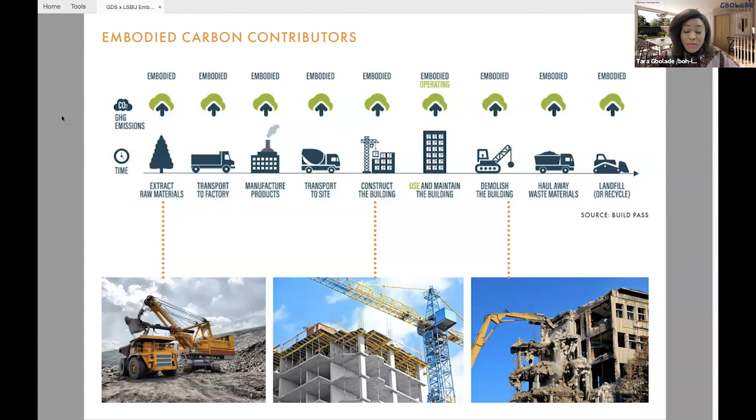We as decision makers have the opportunity and the power to make so many more different choices and decisions, regenerative decisions. When pen hits paper, we are deciding if we're pumping more carbon emissions into the atmosphere. We as architects and built environment specialists make a myriad of daily decisions that either help regenerate or continue to degrade our planet. As a consequence, we decide the quality of life for our communities, our neighbors, and our families. So that's on us. And on that happy note, I'll talk through a couple of projects we're currently working on within the practice that describe how we make better decisions as custodians of our planet.

I will highlight at this point that we recognize we are in transition, me personally, as a practice, industry-wide and nationally as well. And so therefore, I think every win is a win and we should take that and build upon that. So today I'll be talking through Hermitage Mews, which is a small project in London, and another project we're working on in Brixton. I won't really be going through design in detail or approach, but really more about the decisions we've made along the way. So the red, as you can see, highlights our current site.

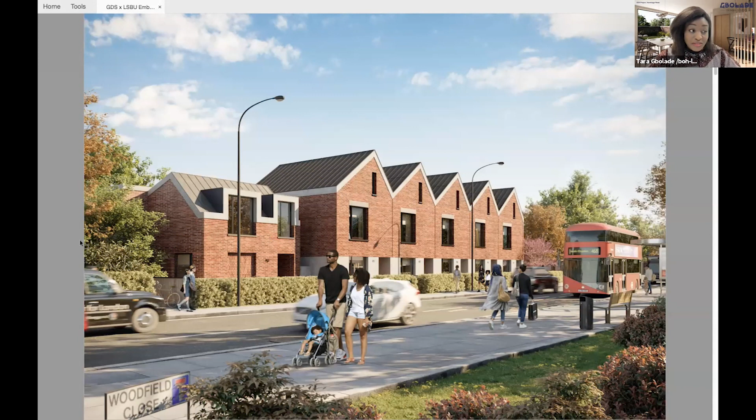It's in Crystal Palace and it accommodates 8 new homes. There were no existing buildings on site. This is a set of 5 terraces, a pair of semi-detached and a detached dwelling. And the scheme is currently on site. As a practice, we always adopt a holistic approach to sustainable design. Of course, this discussion is tailored to embodied carbon, but overall, we ensure that we're addressing aspects such as energy efficiency through to sustainable movement, through to green infrastructure, and that will hopefully come through as I speak today.

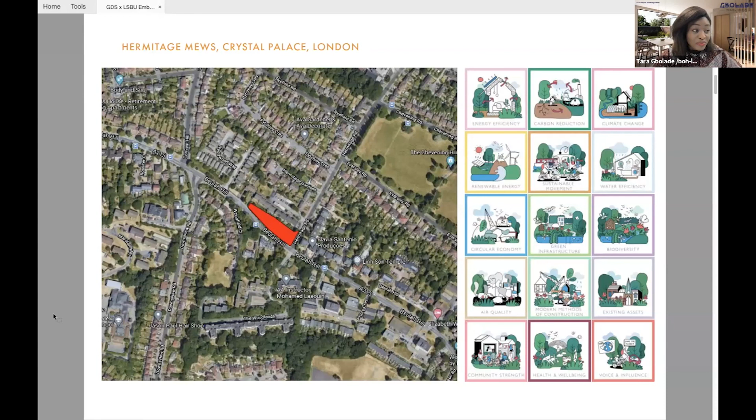The first thing we did, I should say that this scheme had planning by different architects when our clients brought it to us. And so the first thing we did as a practice was to decide with the client on a performance target. We find that these are critical, as highlighted in the earlier talks, for us to get off the ground. The client was good in listening to us, and we agreed on the RIBA 2030 Climate Challenge as a really useful one, mainly because of its simplicity as well.

And I must credit the client for having the appetite and ambition for doing so. And it's important we recognize our role as architects and built environment specialists to influence decision-making. I will highlight here as well that we started the process with many sustainability workshops to ensure that everyone on the team was upskilled as much as possible.

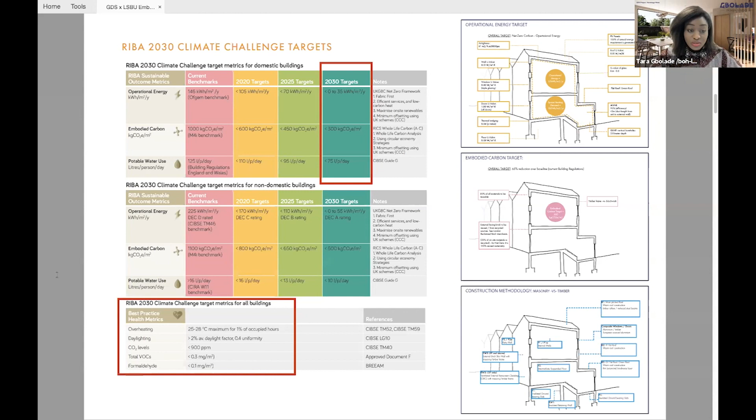And the scheme started with very high-level sketches looking at operational energy separately from embodied carbon, even though we know they're all interlinked, and then through to the construction methodology that would work. I'll expand on these in a moment. The operational energy approach we're pretty confident about, and because we're not having that talk today, I'm going to skip over to our embodied carbon approach.

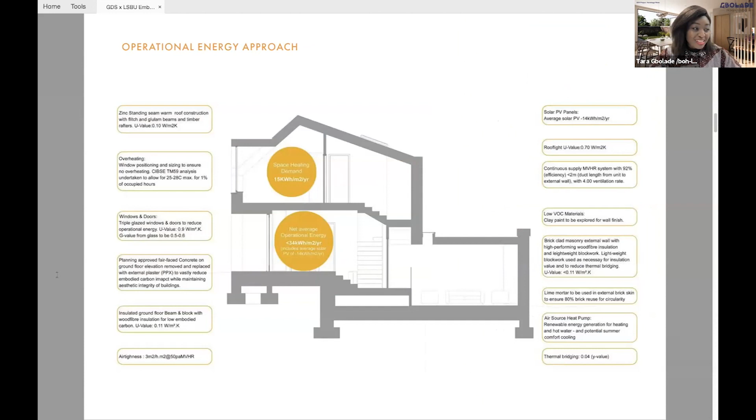We made a myriad of small decisions that we knew would have a larger impact further down the line. Because we had no existing buildings on site, we explored initially the reuse of locally sourced brickwork, which is what we had at planning stage, but also the opportunity to potentially use lime mortar so we could ensure that the building was recyclable if we used new brick. This was abandoned due to curing time and additional programming time, but it's important to highlight that this is an aspiration that the scheme started with.

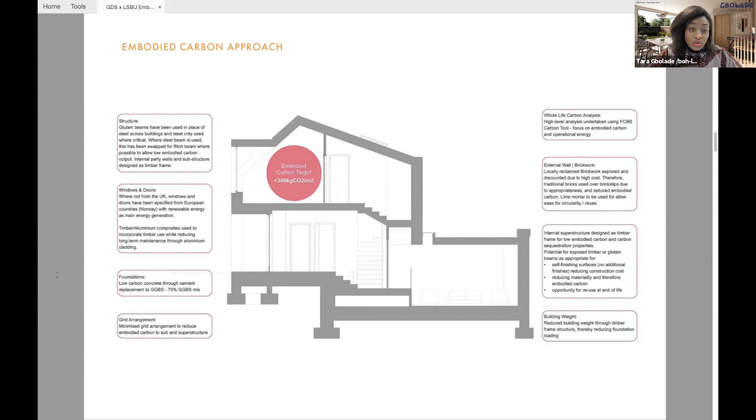We also looked at our structure and looked at the building and rearranged it in a way that meant that we needed less foundations so that the building itself was lighter, thinking ahead to what types of foundations we were going to use. We also, right at the outset, got hold of the FCBS Carbon tool and discussed with our clients what it meant with an overall target of 300 kg of CO2 emissions per square metre if we use masonry construction versus timber.

And you can see that we were trying to target that number of 300 there. And you can see there that initially we were looking at over 1,000 for that. But when we looked at incorporating timber in particular aspects, we were coming right down to 800. And because we had these numbers right at the outset of the scheme, it allowed us to make even more nuanced decisions, which means that as designed, we came down to 450.

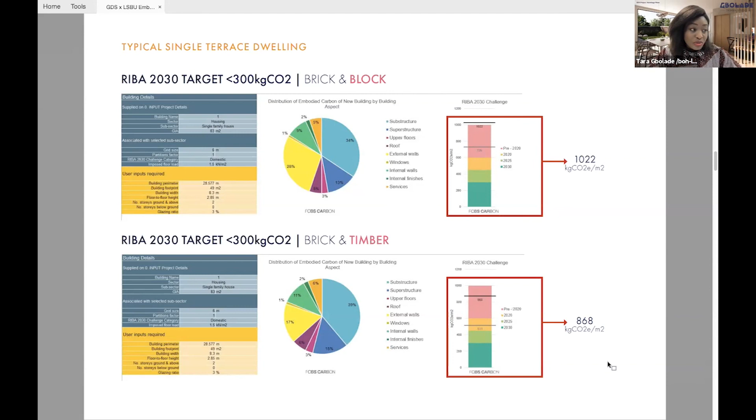I'll now talk about some of the structural decisions we made that meant that we were able to meet these targets. First of all, we recognized that we were going to use concrete, but critically for us, we wanted to understand what type of concrete we were going to use. And so we specified high recycled content, so 70% GGBS, which is in effect a byproduct from the blast furnace used to make iron, for the concrete that we were going to use.

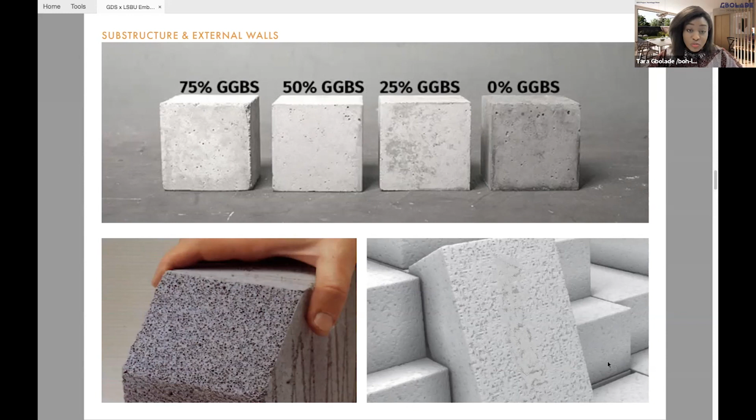And we also used aircrete blocks basically for masonry. So it's a lighter product that we're going to use, which affected our foundations, but gave us the thermal value that overall we were looking for. Our superstructure, we transitioned and moved into timber wherever possible.

So a lot of our beams, columns, party walls, the brief, if you like, to the structural engineer was to get rid of all steel and use timber. We knew that particularly for this scheme, it might not be 100% possible, but it was critical for us to try. And that really massively affected how much embodied carbon we were able to have in our building.

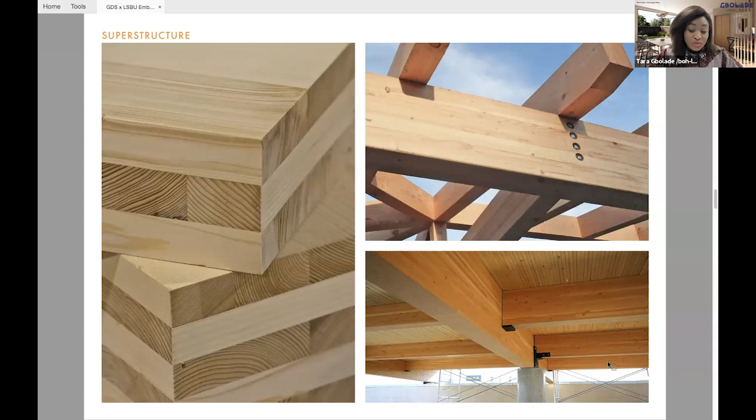So we're glad to say that a lot of the architecture and a lot of the CGIs you might see in a moment is reflective of this type of architecture that expresses itself with the timber that has been used. We also looked at the materials we'd ordinarily use, and specifically, for example, with the external walls, we looked at our insulation and using wood fiber, which outperforms the synthetic products, save for thickness. So it has better thermal performance.

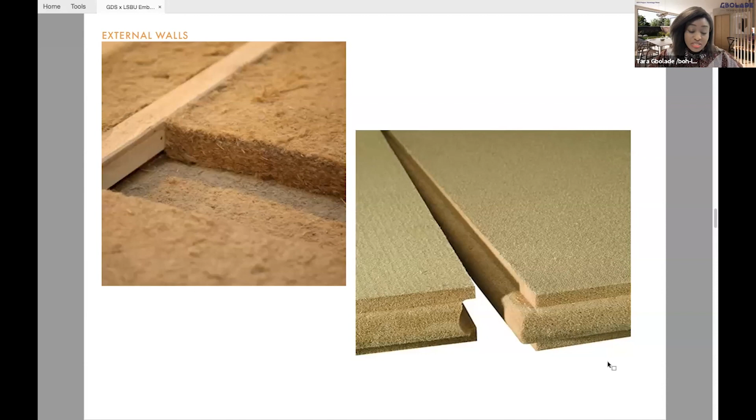Of course, it acts as a carbon sink, much lower embodied carbon, and achieves the as-designed performance as required. Some of these images just highlight some of this, for example, one of the timber beams that are exposed and expressed so the owners of the homes get to know the types of homes they're living in, which obviously we know addresses their annual energy use as well.

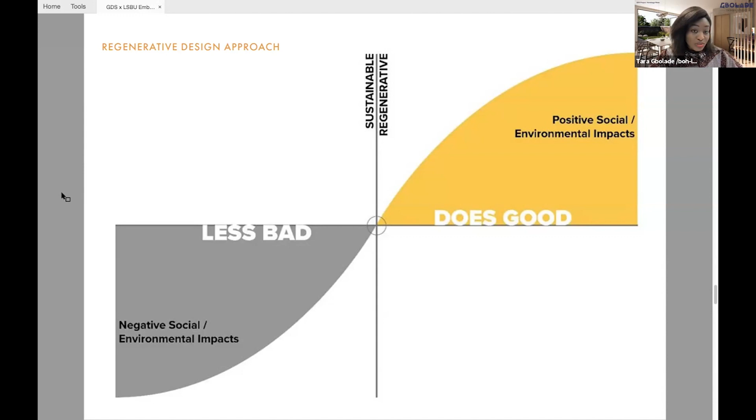And very quickly, I'll just end with sort of learning from that project and moving on. We're looking at a scheme in Brixton. And here the overall goal was going beyond doing less bad and looking for the net positive gain in everything we did. The scheme itself allowed us to do that, and the clients and occupiers we're working with allowed us to do that. So the scheme is in Brixton, and first of all, we have an existing building which is listed, so it will be reused. It has to be reused anyway, but we're upgrading that to EnerPHit standards.

Attached to that are these extensions which we are exploring and ensuring are being designed for disassembly, because we explored different feasibility options, and eventually we decided, well, there's no reason for the tyranny of the or, for the occupiers to have to choose between one versus the other, but actually have a building that has the ability to adapt and change with them and their needs over time, which means, of course, it's a longer lasting building and has a longer, more adaptable life.

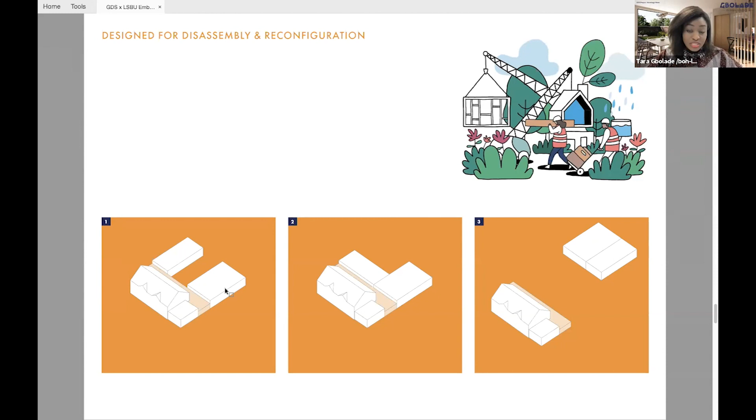Again, right from the outset, we employed the carbon tool again, and started to see that because of the decisions we were making, it's mainly CLT as the structure, wood fiber insulation. This idea of disassembly gave us the opportunity to massively reduce and meet the RIBA 2030 climate challenge goals here as well. We looked at different materiality internally as well, so looking at cork and recycled timber.

But to that, I just want to quickly touch on our moss. We decided to really explore how varying materials and the green infrastructure in and around our site play their part in addressing climate change. We know that moss will sequester and store carbon and cleans the air locally around the site, which is quite important because this particular site sits on a junction, which means there's a lot of vehicular air pollution. We looked at different types of brick, including StoneCycle, which has 65% recycled content from ceramics.

But we are looking at exploring K-Briq, actually, which was mentioned in Dezeen, I think maybe last year. And why this was the preferred choice for us is that it's 90% recycled brick, recycled from construction and demolition waste. But also what we found quite interesting was actually even the coloring of the brick is formed from recycled ink cartridges.